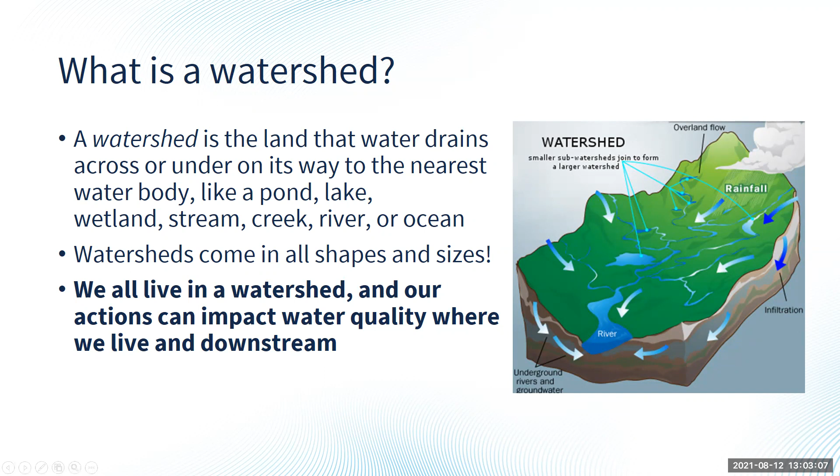NOAA recently released its most current report on the hypoxic zone on August 3rd, 2021. The 2021 Gulf of Mexico hypoxic zone was reported at approximately 6,300 square miles, which is equivalent to 4 million acres of habitat that is potentially unavailable to fish and bottom species. The hypoxic zone in 2021 was larger than average and almost 3 times larger than the 2035 target that's been set by the Hypoxia Task Force.

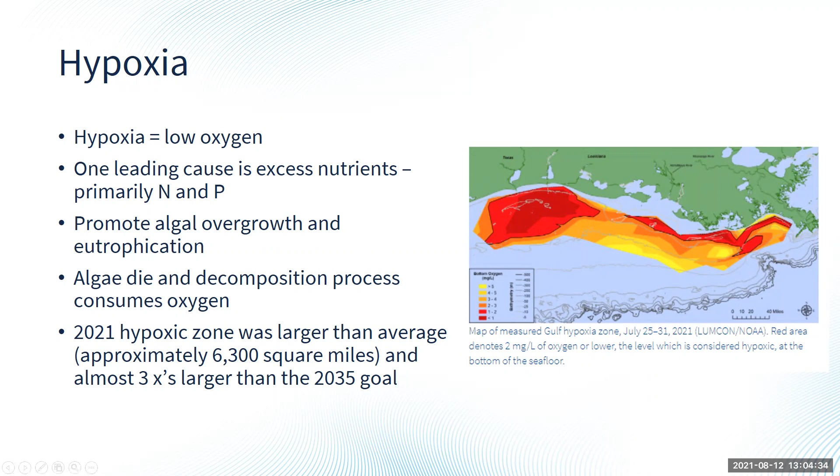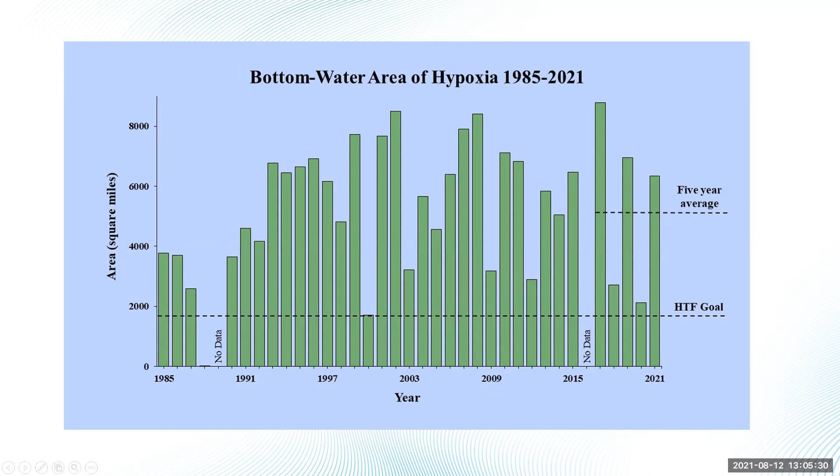So this brings us to the Nutrient Loss Reduction Strategy. The US EPA required that the 12 highest contributing states that drain into the Mississippi River create plans on how each state can reduce its nutrient loss. The Illinois plan was released on July 21st, 2015, and addresses nutrient loads from point sources, urban stormwater, and non-point sources. The interim goal is to reduce nitrate nitrogen loss by 15% and total phosphorus loss by 25% by the year 2025. The final goal is to reduce nitrate and phosphorus losses by 45%.

Since the plan was released in 2015, we've had two biennial reports that have been published. The first was in 2017 and the second was in 2019. There is a third report coming out a little bit later this year.

Now you have some background information. Let's move on to the edge of field practices. And we're going to start with drainage water management, which is also called controlled drainage. And though it's technically not considered an edge of field practice, we're going to include it in our talk today.

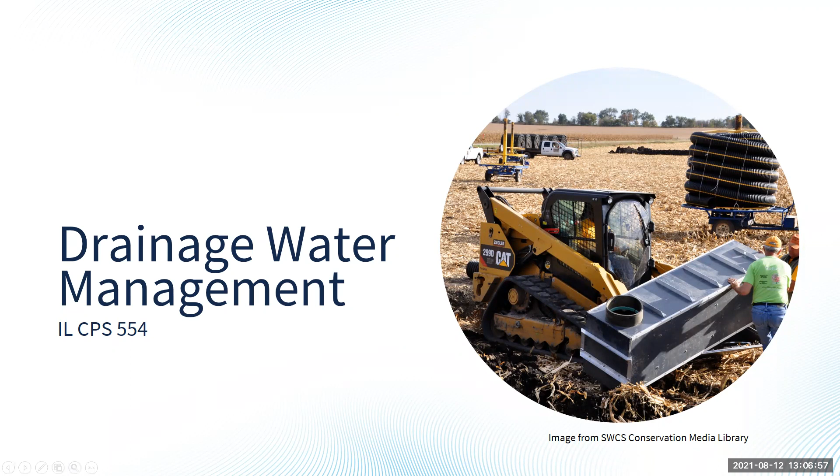So drainage water management, or controlled drainage, is the process of adjusting the elevation of a drainage system outlet called a control structure to control the volume of water leaving the field and reduce nutrient loss. The picture on the right compares conventional drainage to controlled drainage, and the controlled drainage structure can be used to adjust the height of the water table by adding or removing gates or stop logs.

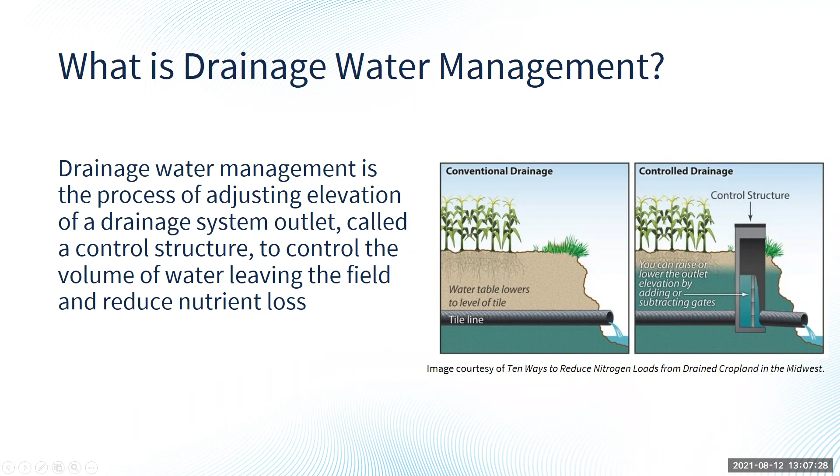Control structures can be either manual or automatic. Stop logs or gates are inserted or removed to control the height of the water table, depending on the time of year. A typical management scenario involves raising the outlet level post-harvest to reduce drainage and nutrient loss during the non-growing season. Then the stop logs are removed prior to spring to lower the water table, which will help improve the trafficability and allow for field operations.

Following spring operations, stop logs are put back into place to reduce nutrient loss and potentially store water from spring rains to be available later in the growing season.

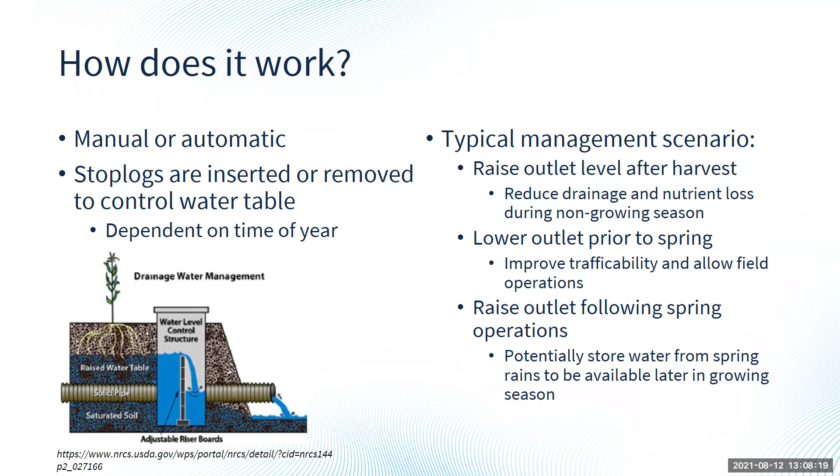Drainage water management, or DWM, is an Illinois Conservation Practice Standard 554 and is the process of managing the drainage volume and water table elevation by regulating the flow from a surface or subsurface agricultural drainage system. The purpose of the DWM is to reduce nutrient, pathogen, and pesticide loading from drainage systems to improve productivity, health, and vigor of plants and reduce oxidation of soil organic matter.

DWM is especially applicable in highly permeable and organic soils. Management decisions are based on the time, stage of the water held in ditches, pumping schedules, and coordination of these factors with rainfall, season, crop needs, and soil requirements. The picture on the right is of the installation of a control structure. And in the middle, you can see where the stop logs or gates can be added or removed as needed.

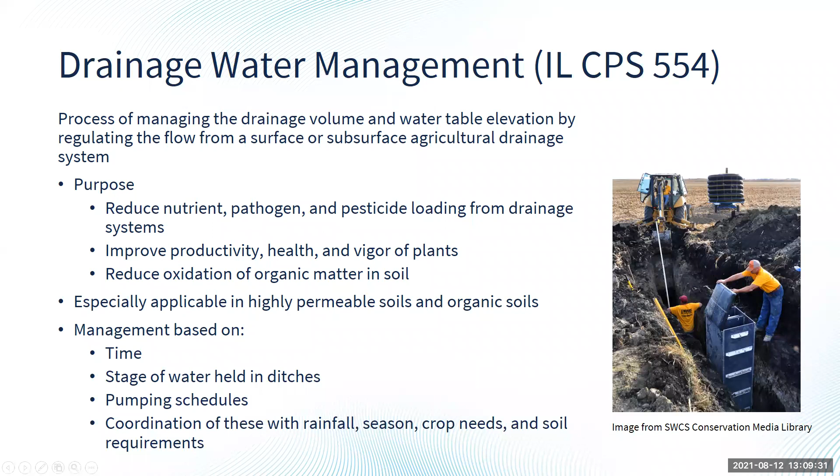Drainage water, sorry about that.

DWM can be used with any new or existing tile drainage system, both surface and subsurface drainage. DWM is typically used on land where the average slope is less than 1%. And for land with steeper topography, DWM can be used, but will require additional control structures, which will increase the total cost.

DWM should be used in areas where drainage is needed during certain periods of the growing season and where it might be advantageous to limit outflow at other times. For example, if you are in an area that has drought conditions that are intermittent and short, or in areas where a seasonally high water table is within 18 inches of the surface during the growing season, those would be possible locations for DWM. You also need to have at least 15 acres of contiguous surface area.

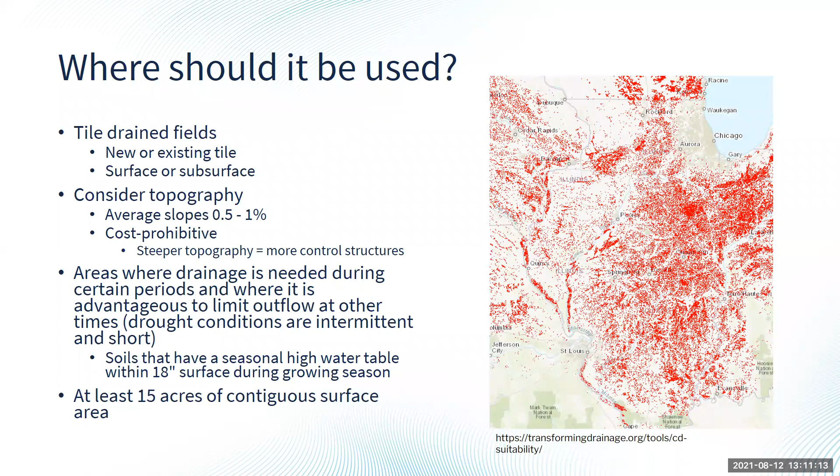And as with everything, there are pros and cons to drainage water management. The pros include reducing nutrient export through the tile drains by reducing drainage volume, reducing surface runoff and erosion, allowing the adjustment of the water table and water storage, and potentially increasing or improving yields. However, currently the data is limited and inconclusive on that.

Cons would include that it's used primarily on flatter topography. You're going to have increased installation, operation, and maintenance costs, as well as increased management to operate and maintain. And with that, I'm going to hand it over to Jennifer to discuss another edge of field practice.

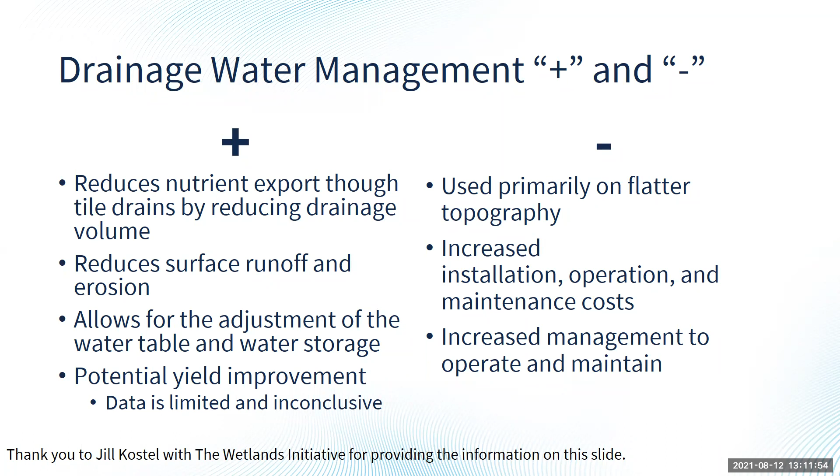Thank you, Rachel. I am going to request control from Rachel really quick. There you go. All right, awesome. Thanks everyone for being here with us this afternoon.

So my name is Jennifer and I will be continuing on with the next practice. Today we'll be talking about saturated buffers as well. So as Rachel mentioned earlier, the next nutrient loss reduction strategy biennial report will be coming out soon, hopefully in the next couple months. And so actually what's exciting about this upcoming report is that saturated buffers will be added as one of the new best practices recommended in the nutrient loss reduction strategy.

And so this came down through the science committee of the nutrient loss reduction strategy. They reviewed a lot of scientific research to show that saturated buffers are a good way to improve water quality in Illinois. And so it is being adopted into the nutrient loss reduction strategy. So that is pretty exciting. And I also want to thank Jill Kostel with the Wetlands Initiative for providing much of the following information.

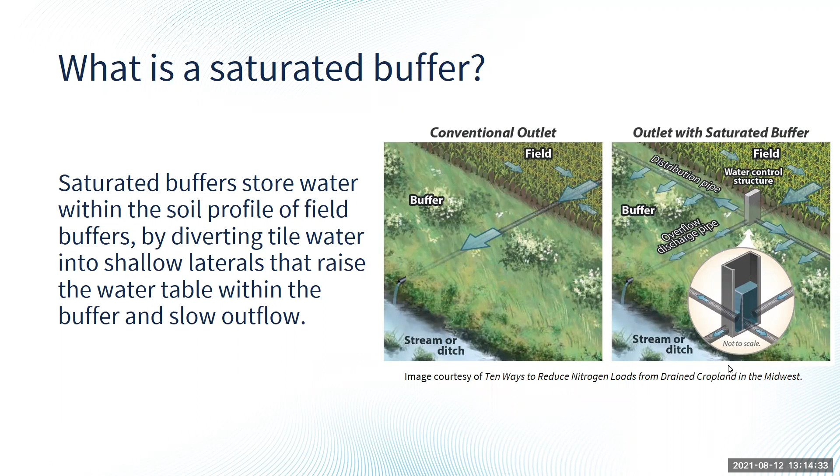And so what happens then is that the water is pushed out into the saturated buffer and allowed to percolate through the soil. So Rachel, I might just need you to advance the slides for me. You can go to the next slide.

Okay, thank you. So how exactly does a saturated buffer work? So while the water is working its way toward the stream underneath the ground, the soil and growing plants that are on the surface are naturally filtering out some of those nutrients that otherwise would have been directly deposited into the stream if we had allowed the tile water to just exit immediately into the stream.

So additionally, when the buffer becomes fully saturated and anaerobic conditions are reached, which anaerobic means no oxygen, the denitrifying bacteria that are in the soil can work to convert nitrates to nitrogen gas. So nitrogen gas is a safe form of nitrogen. Our air that we breathe every day is 78% nitrogen gas.

So instead of nitrates going into our water, we would rather convert them into a safer form like nitrogen gas. And so the bacteria use the soil as their carbon source or their energy to convert the nitrates into nitrogen gas.

And additionally, if excessive amounts of precipitation were to fall at once, so if we were to get a big rainfall, there is a way for water to bypass the saturated buffer in order to prevent water backing up and flooding the field. So we don't want this practice to cause flooding in the field. If we get a lot of rain, we want it to work efficiently.

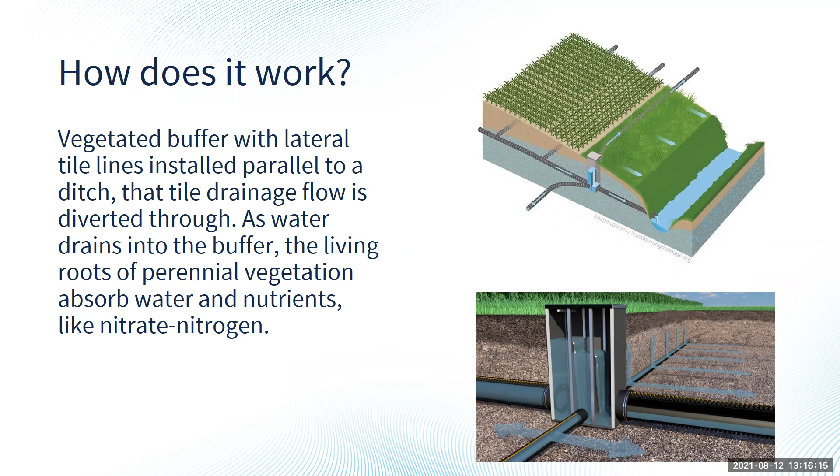Okay, and saturated buffers are the Illinois conservation practice number 604. And so Rachel talked about the conservation practice standard for the drainage water control structures as well, but just a little background, a conservation practice standard is developed by the USDA Natural Resources Conservation Service, and it's science-based. So these standards help build practices that will perform and last as expected.

And so each conservation practice standard includes the practice name, its unique code, a unit of measure for it, the definition and purpose of the practice, conditions that are necessary for the practice to be installed, criteria for the practice, plans and specifications, operation and maintenance, and scientific references. So for each practice, NRCS creates these standards so that they can be used by everyone to make sure the practices are being installed correctly and in a way that they will perform well for a long time.

So on this slide, these are the main conditions and criteria necessary to install a saturated buffer. And so Erin just dropped the link into the chat for the conservation practice standard if you want to look through that too. There's a lot more information than just this, but these are some of the highlights for conditions that are necessary.

So we do need a restrictive layer or a water table in order to create those saturated conditions in the buffer so that whenever water is diverted into the buffer, it doesn't just drain through. Like if we had a sandy soil, it might just drain through too quickly. We want to create anaerobic conditions there.

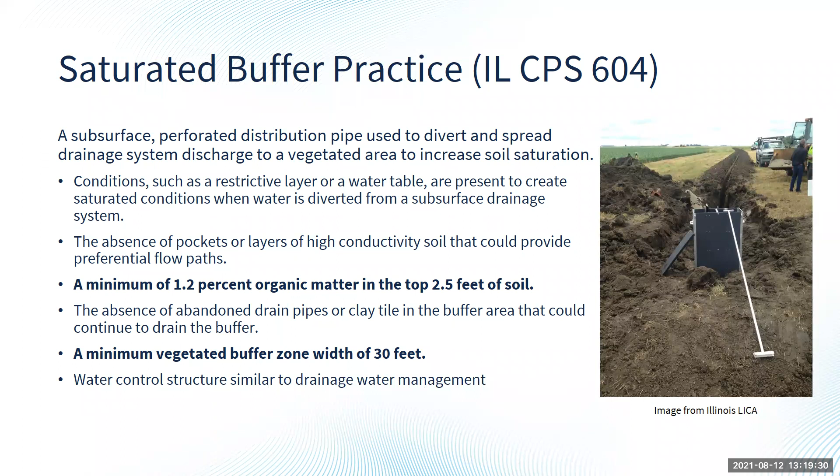Okay, so where should a saturated buffer be used? A little bit of this is repetitive from what we just talked about, but again, of course, we need a drainage system. So we need a field that has a tile drainage system installed, and it needs 6 to 12-inch mains. There needs to be at least the 30-foot width of a perennial vegetative buffer. We need stable stream banks. So if the tile's dropping out into a stream, it needs to have stable banks. Again, we need the buffer to have at least 1.2% soil organic matter in the top 2.5 feet.

We need no sand or gravel layers along the length of the distribution line, that perforated pipe, because again, we don't want the water to just drain out of the soil immediately. We need it to become saturated. And we need, again, that restrictive layer to create that saturated zone within soil. And then it works best when the tile outlet is lower than the contributing field. So we don't want the tile outlet to be higher than the field that the tile is draining out of.

And so this picture on the right is a saturated buffer installation that was in Champaign County a couple of years ago. And so you can see they were just putting in the perforated tile here down the center of the buffer. And let's see, I do have one last slide. There we go, saturated buffers. So the pros and cons.

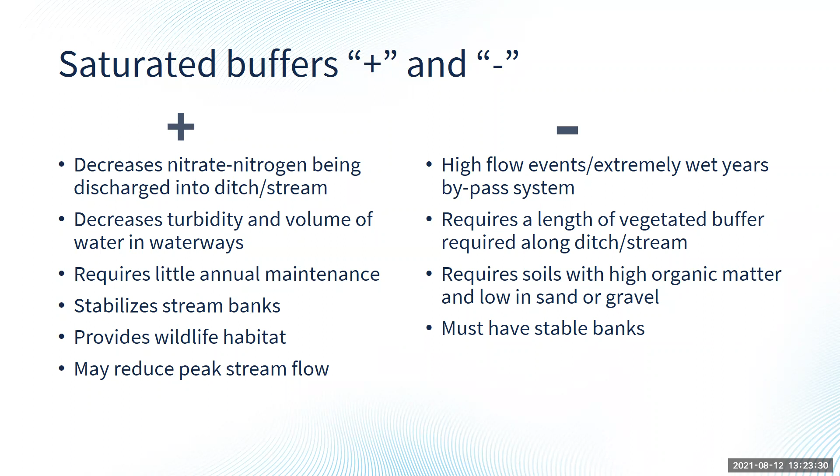So I will turn it back to Rachel for the next part. Great, thank you.

So a woodchip bioreactor is a lined trench filled with a carbon source. Oftentimes that's going to be wood. Wood chips are the carbon source of choice for most bioreactors due to the longer lifespan of wood chips as compared to other carbon sources like corn cobs, corn stalks, or wheat straw, for example. The microbes are going to eat up the corn cobs a lot faster than they're going to the wood chips.

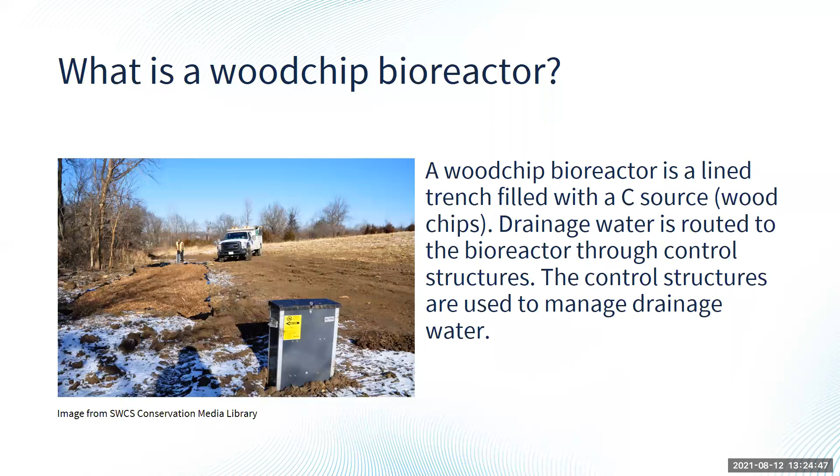So the drainage water is routed into the bioreactor by a control structure during a typical flow event, but it also allows water to bypass the bioreactor during times of high flow events, like Jennifer was just talking about. And then there's another control structure that's located at the other end, which is used to maintain the water level within the woodchip bioreactor.

So within the bioreactor, bacteria, denitrifiers to be exact, convert nitrate into nitrogen gas through a process called denitrification, which Jennifer told you about. The bacteria use the wood chips as their food source and use nitrate as part of their respiration process. Bacteria can also breathe oxygen, which is why it's really important to have an anaerobic condition, or the absence of oxygen. So then they'll force the bacteria to use the nitrates rather than oxygen.

Bioreactors typically have two control structures, as I mentioned a few moments ago. The inlet diverts the water into the bioreactor, but allows water to bypass during a time of high volume. And a second structure is at the outlet of the bioreactor and can be raised or lowered to maintain the water depth within the bioreactor. Bioreactors enhance the natural denitrification process.

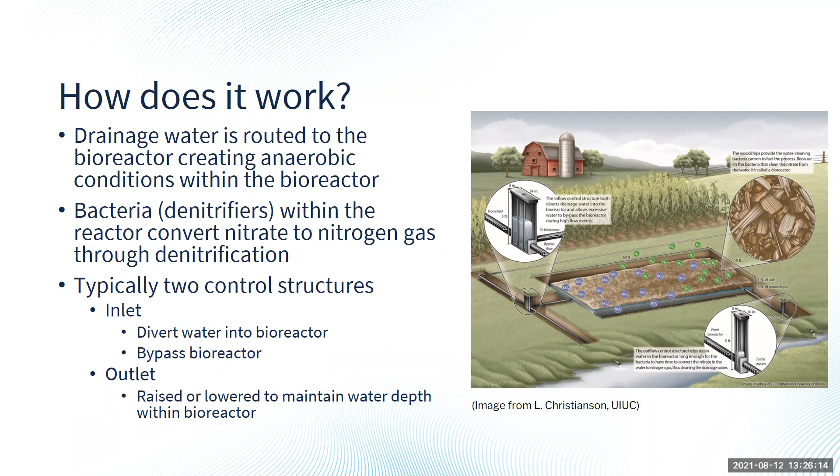The Woodchip Bioreactor is Illinois Conservation Practice Standard 605, and it is defined as a structure that uses wood chips to reduce the concentration of nitrate nitrogen in subsurface agricultural drainage flow via enhanced denitrification, which is just a fancy way of what I explained just a few moments ago. And the purpose of the bioreactor is to improve water quality by reducing nitrate nitrogen in drainage water that is entering the watershed.

So the design must be either to treat the peak flow from a 10-year, 24-hour drain flow event, treat at least 15% of peak flow with a hydraulic retention time of at least 3 hours, or to treat at least 60% of the long-term average flow from the drainage area.

And the size of the bioreactor varies depending on the drainage area. It is typically a 4:1 length to width ratio or greater. And commonly bioreactors are about 100 to 125 feet long and about 10 to 25 feet wide. And that's all dependent on the available space as well as the drainage area.

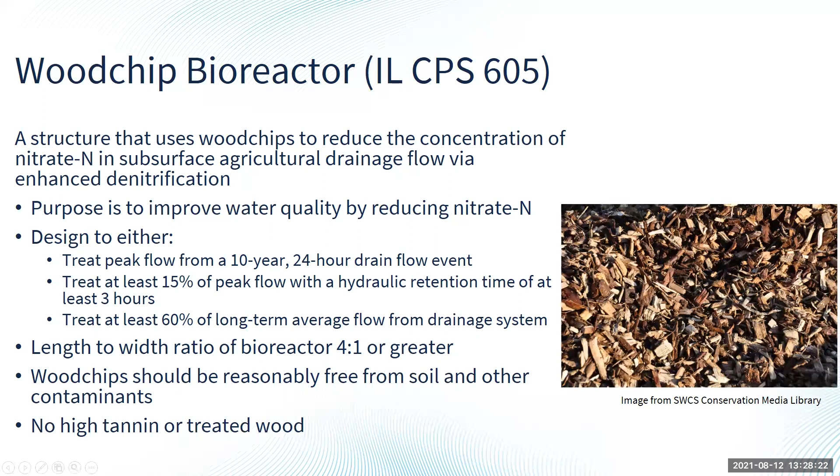So bioreactors are ideal for drainage areas of 30 to 100 acres, and they can be added to existing tile drainage systems as long as you have 6 to 10 inch mains with constant flow, and it's primarily subsurface drainage. Bioreactors should be placed in areas of the field where equipment can operate without driving over the bioreactor chamber, like buffer strips or grass area, so that no land is taken out of production.

And the bioreactor should be placed in an area where the elevation of the bioreactor allows for proper drainage of the crop fields. Again, like Jennifer mentioned for saturated buffers, to make sure that there isn't any ponding in the field.

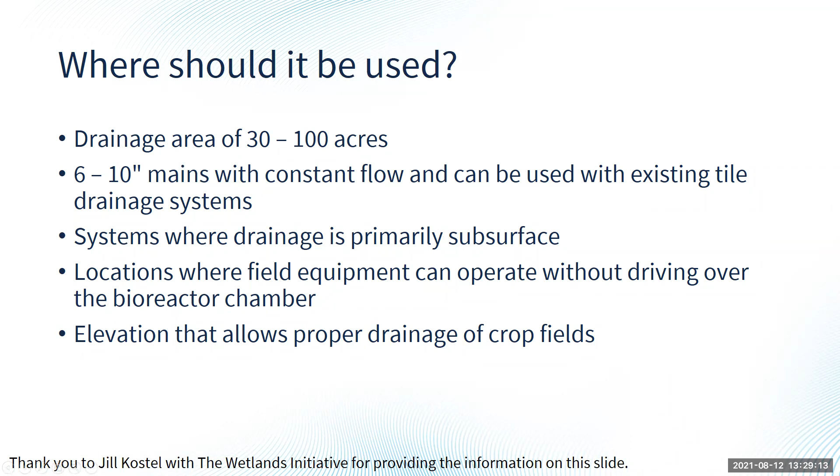And again, there are pluses and minuses to woodchip bioreactors. The positives include reduced nitrate leaving the field through drainage and surface runoff. It doesn't impact in-field management. The wood chips last typically 10 to 20 years before they're going to need to be replaced.

It requires minimal effort, just normally adjusting the stop logs at the outlet control structures twice a year, depending on the year. And it is overall fairly low maintenance once it's installed. The area above the bioreactor may potentially provide habitat benefits depending on the vegetation that is chosen.

Some of the negatives include the high upfront cost, which can range from $7,000 to $10,000. And in times of high flow events, the water is going to bypass the system, which means that it's not taking the nitrates out. There can be a lack of available and affordable wood chips. The startup outflow will contain organics.

Incomplete denitrification can occur, and that will result in nitrous oxide, which is a greenhouse gas. There's the high retention time, which can increase hydrogen sulfide gas and methyl mercury. And the process in the bioreactor is a biological process, so nitrate removal can be negatively impacted by cooler temperatures or too high of flow rates.

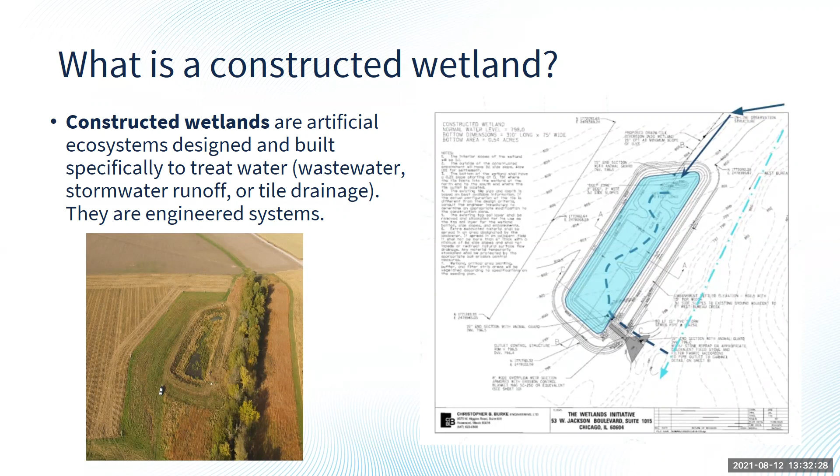So this is not to be confused with a wetland restoration, wetland creation, or wetland enhancement, where the purpose of those is to restore, create, or enhance wetland functions other than wastewater treatment or water quality improvement. So with a constructed wetland, the main reason we're doing this is to improve water quality. Next slide.

And so the oxygen gradients allow for both aerobic and anaerobic conditions to occur near that interface, the sediment water interface, and then biofilms on plants. So then carbon, again, is the energy source for the bacteria. That carbon supply comes from the plant roots, exudates, and the accumulated decomposing plants, algae, fungi, organisms, etc. All that dead stuff at the bottom of the wetland is where the bacteria are getting their energy from to do this denitrification process.

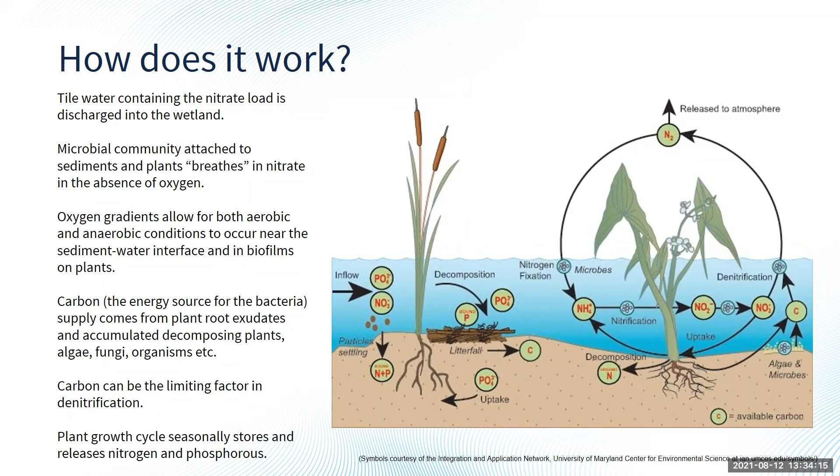And so carbon can be the limiting factor for denitrification. If we don't have enough of that dead stuff at the bottom, that could limit the amount of denitrification that can occur. Plant growth cycles seasonally store and release nitrogen and phosphorus. In the image, you can see the plants are taking up nutrients to grow, so they're taking up some of that phosphorus and nitrogen. And as their cycles go through the season, they decompose and it can release nitrogen and phosphorus back into the wetland. Okay, next slide.

Okay, so constructed wetlands are Illinois Conservation Practice Standard number 656. Their official definition is an artificial ecosystem with hydrophytic vegetation for water treatment. Hydrophytic vegetation means plants that can grow in water. Erin just dropped that conservation practice standard into the chat as well. And so here are the main conditions and criteria that are necessary to install a constructed wetland.

We do need to build a shallow pond with an auxiliary spillway. We need to use a water control structure to maintain a normal operating pool and to manage for the plant community establishment. So again, the plants that go into a wetland are hydrophytic, so they need water present. We don't want the wetland to dry up, or else we might not be able to establish our plants.

We need to account for accretion in wetland volume. We need to maximize the hydraulic retention time and flow path. So again, we want to retain water in the wetland as long as we can, because that allows for more denitrification to occur. And so that's the whole point of the wetland, is to allow that denitrification process to occur. So we don't want the water to just flow through it super quickly and exit. We want it to be retained.

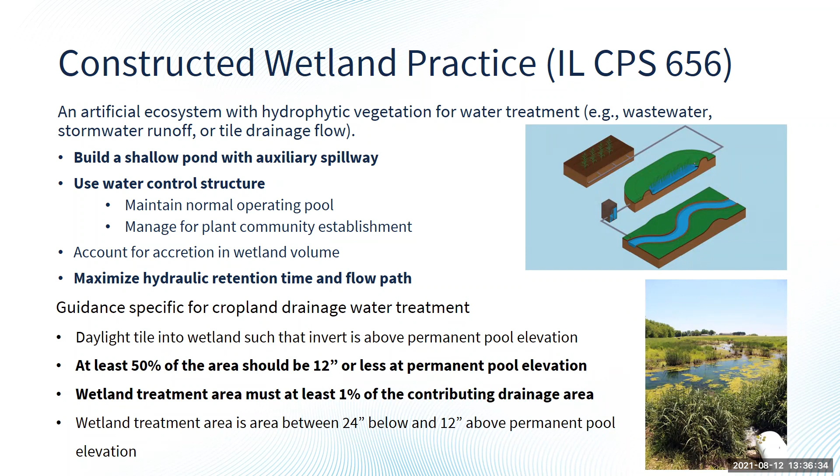So every wetland is going to be different depending on your drainage area. Wetlands will be different sizes just depending on how much water you're trying to treat. And the wetland treatment area is between 24 inches below and 12 inches above the permanent pool elevation. Okay, so next slide, please.

Okay, so where should it be used? Again, this is just some guidance. We need sufficient tile drainage. So of course, kind of the same with all the practices we've been talking about, we need to have tile drainage to be able to implement them. And so we are diverting that tile flow into the wetland.

We need an area for the wetland and surrounding buffer. And so preferably that would be on low or non-profitable land. We don't want to take out your highly productive land. If we can avoid it, we want to just use something that maybe isn't producing as highly or is already in a buffer perhaps. We also want it to be in a lower spot in the field so that we can daylight the tile, which means that's where the tile is coming out of the ground. So daylight it and not impact your crops nearby. Again, we don't want it flooding the fields. We want it to go into the wetland.

We need for the site to have soils that are capable of holding a water table. So they either have a shallow water table or they have sufficient clay at the depth to serve kind of as a liner for the wetland. So again, it's kind of the same process as a saturated buffer. We don't want the water to just drain out. Obviously, we want it to be held within the wetland. And so we need that shallow water table or clay to help us retain the water there.

We need soils that can grow plants, of course, so loamy or medium texture topsoil. And this isn't necessary, but it is ideal to have prior converted farmland, so land that was formerly a wetland area. It's nice to be able to just take that land and convert it back into a constructed wetland, but that's not required. And then we do need bank stability if that's applicable for your particular site. Okay, next slide.

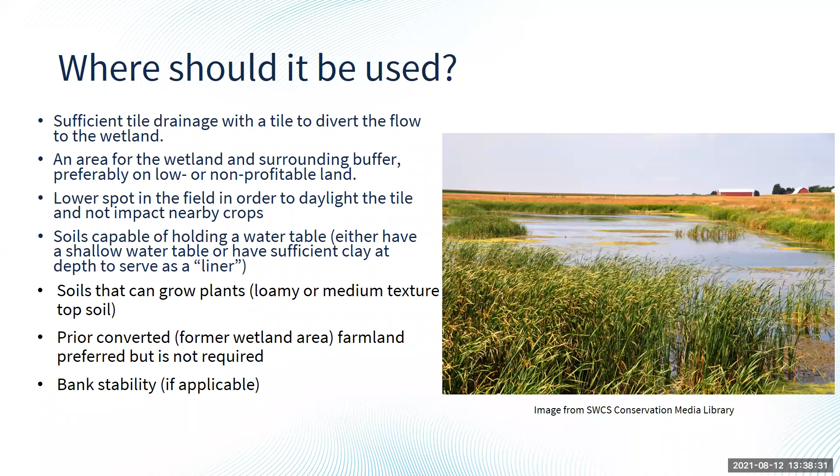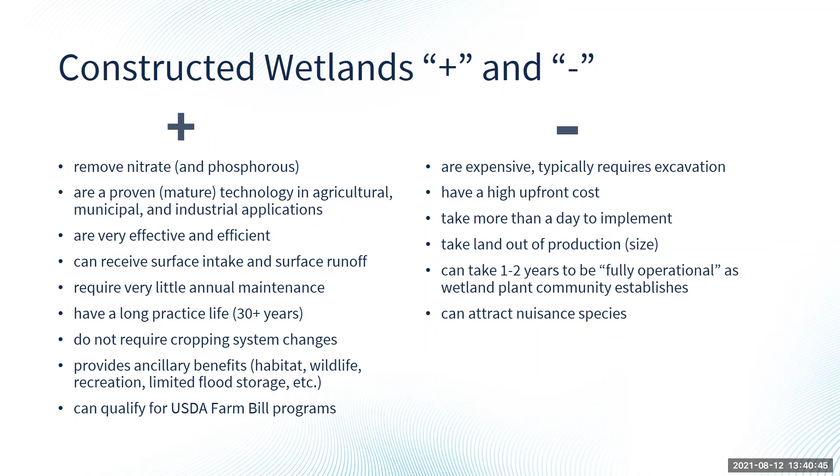Okay, and I just want to say there are some cost share dollars available with constructed wetlands, like I mentioned, through NRCS or USDA farm bills. So that is one thing that can help with some of those costs.